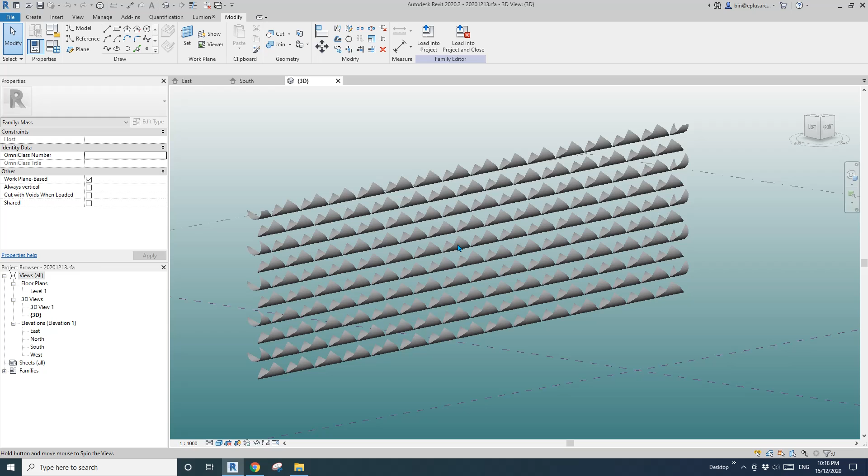So I think I built a parameter. Let me try this - so I built a parameter here, and if I change this, for example, change this to a huge number, it will close this panel.

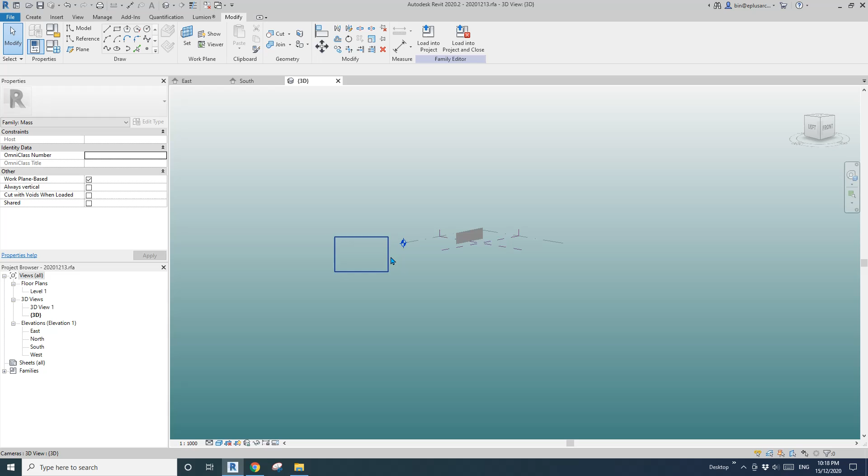So maybe I'll turn on the edge. Yeah, so these are the panels - so when it's closed, and then if I change the parameter, I can open them up.

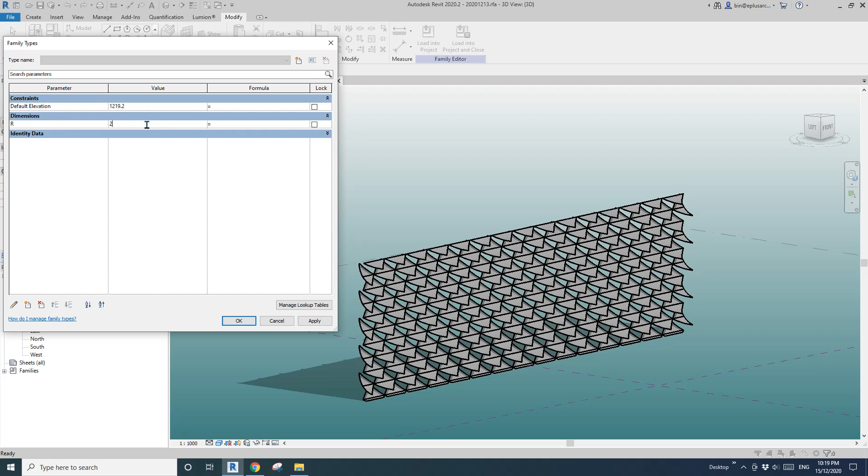Okay, so now let's do this. Okay, so I'll close this.

So first, we're going to create a curtain panel pattern-based family. Okay, so then select this tile pattern grids and change it to - how do you pronounce this - rhomboid.

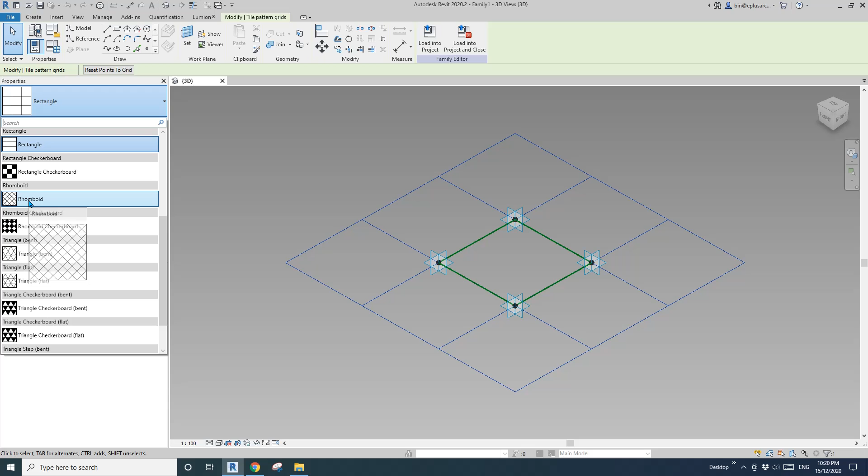Okay, so now actually I'm not sure which point is the top one. 1, 2, 3, 4. Top one, front. It says front here. Let me guess - this is the top. Okay, so 2 is the top. 3, 4, 1. Okay, so now let's start.

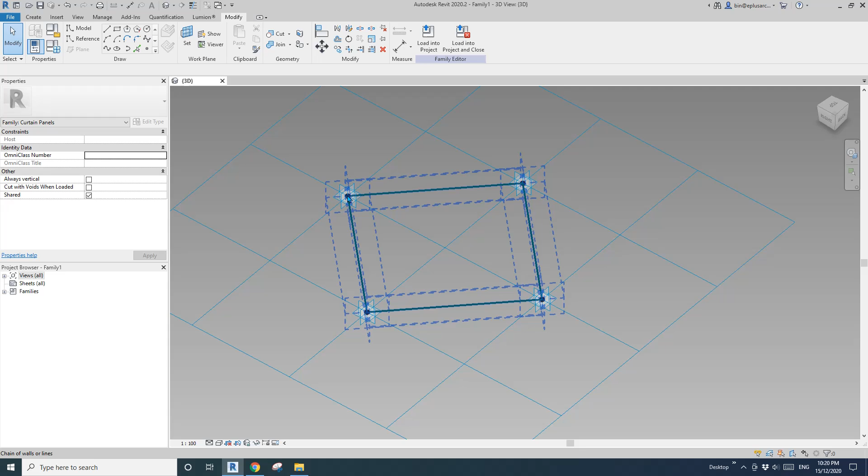Let me think, how do I model this? So first we need one point from this. Okay, this point - so one point, and draw a work plane.

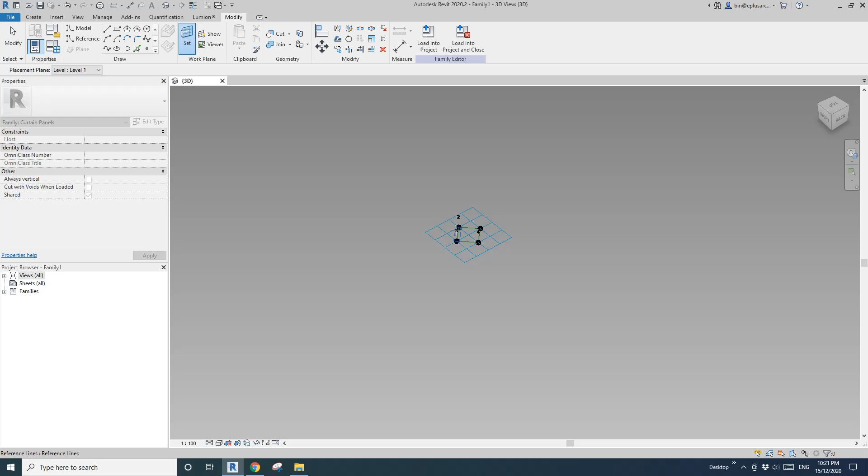Set work plane. Pick the horizontal work plane of adaptive point 2. Where's the number 2? Yep, here. So pick the horizontal work plane of this point and place it on point 2, and then select this point and drag it up.

Okay, so now I'm going to create this panel. It will be created from a curve, and this will be the center point of this curve.

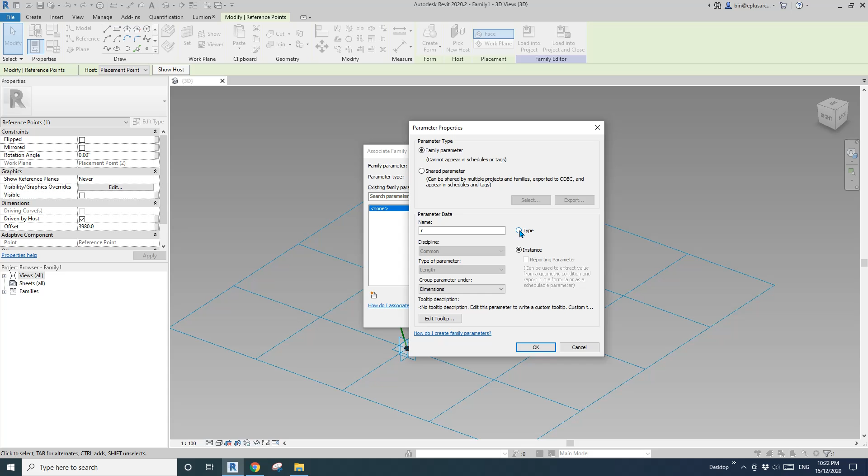Okay, so first I'm going to create an offset. So this point - see this point, that's the offset. That's the distance from adaptive point 2 to this point. So I'm going to create it, I'll call it radius. Okay, radius. Instance, no, maybe type, maybe instance. Okay, and okay.

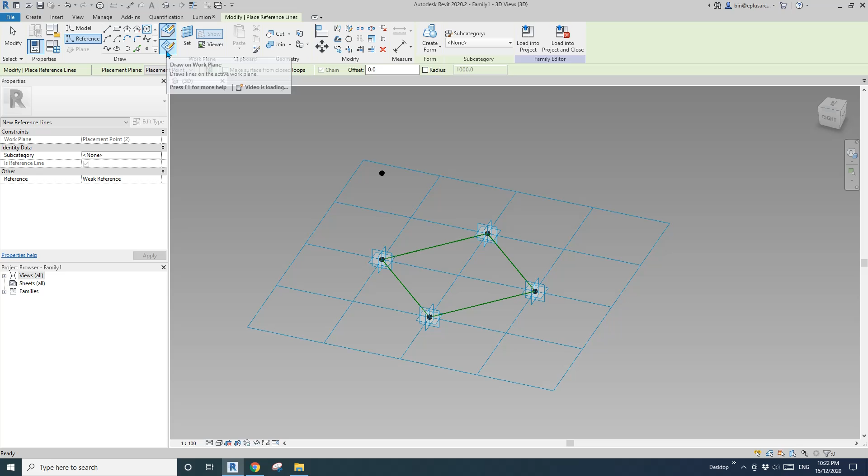So now we are going to create a circle from this point. Okay, so reference circle, and draw on work plane, set work plane. Make sure you pick this work plane, so it's this one - this direction. Yep, that's it. And then draw a circle.

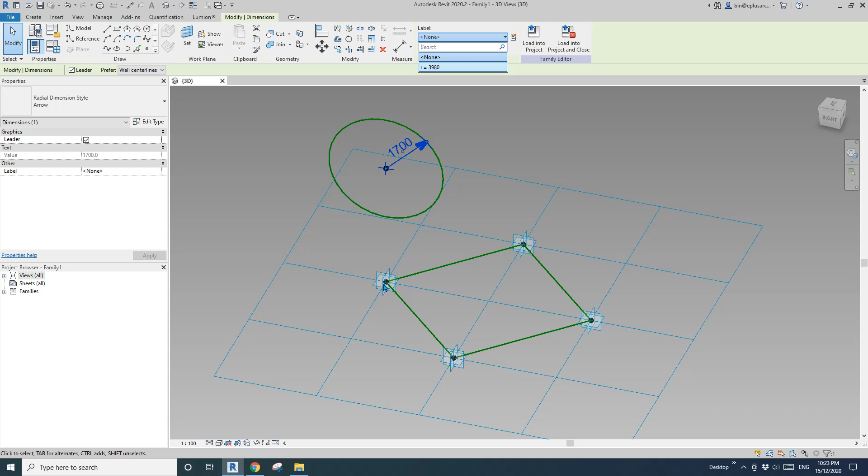Okay, so click on this little thing, and this will be the radius of this circle, and I'll just link this to the radius we just created - that's the offset from here to here. So if I link this, you will see this circle will go through this point. Okay, so if I move this point up, you will see the circle will always go through point 2, adaptive point 2.

So now I'm going to create and place a point on this circle. Okay, so point, this time draw on face and place it on this circle. Place it here. Okay, so now select this point, and here measurement type, change it to segment length, and let me just type in 0. Okay, so it looks like 0, it starts from here, but ideally I want this to start from this point.

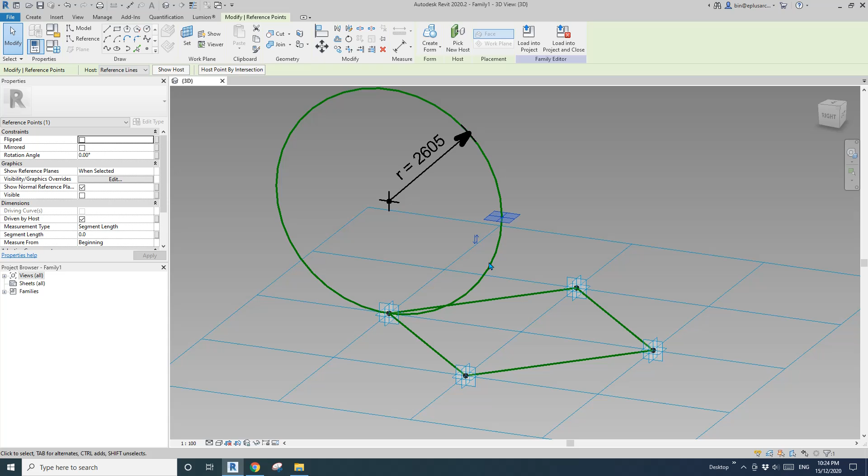So what I'm going to do is I'll see if I can rotate this circle. Okay, I'll rotate this by 90 degrees. Looks like no, it doesn't work this way. It's okay, let me think. How do we rotate this? How do we rotate the starting point of this?

Maybe we need some point - we need some point to rotate, which can rotate this direction. Okay, so what I'm going to do is I'll just delete this circle for now.

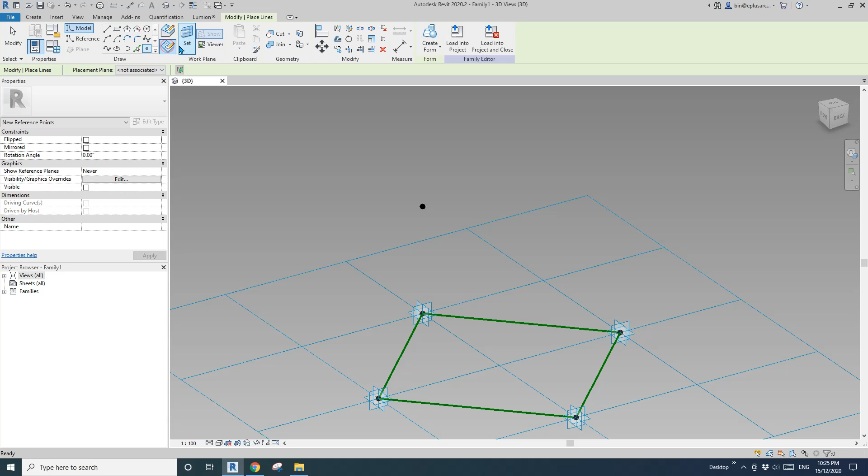Delete this point. So I'll create a point from this point. Okay, so place one point, draw on work plane, set work plane, and pick this work plane, so this one's okay, and place it on this point, and then I'll just rotate it. I'll just offset this point by a little distance, and then I'll create a spline and a reference line.

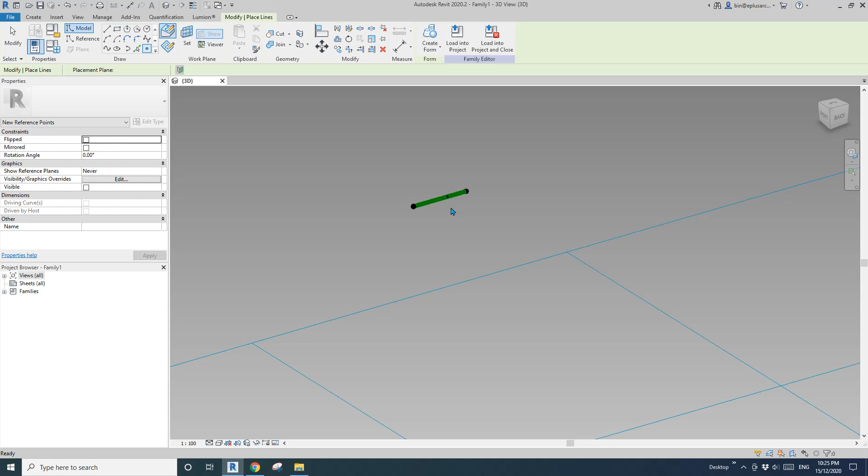Now I'm going to place another point, draw on face, and place it on this reference line. So now this point will have a rotation angle, here it's 0 degree. So now I can draw a circle on this point, and we can rotate this circle using this rotation angle.

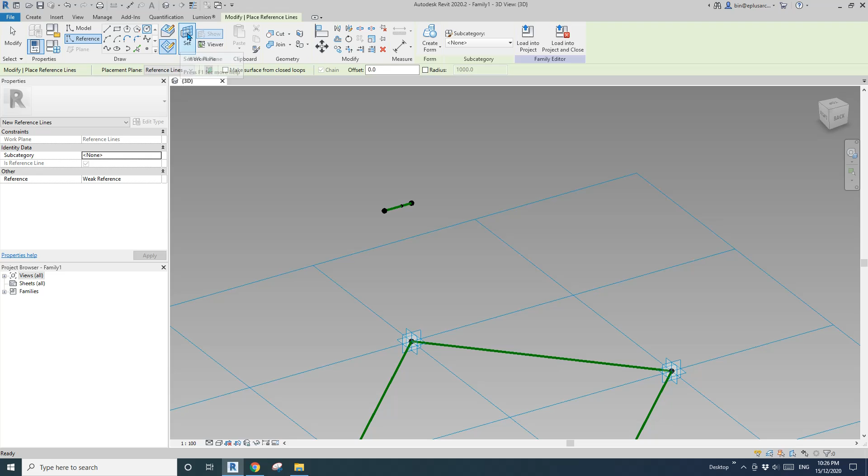So let's do it. Reference circle, draw on work plane, set work plane, pick this work plane of this point, and draw a circle and radius, and link this radius. So of course it's now offset from this point. We just need to select this point and change it to 0.

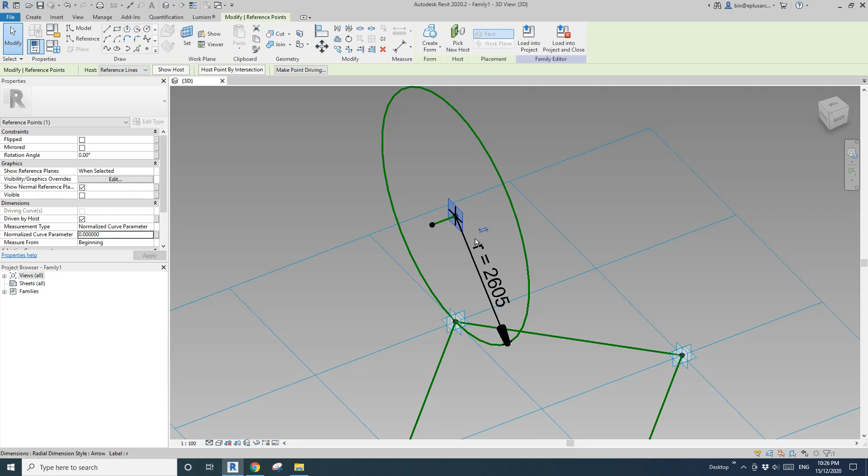So now we'll go through this point, and I'll just leave it for now. I'll place another point, draw on face, place it on here, and select this point, change this to segment length, this time change it to 0 to see. Oh actually, see, it's exactly sitting at the bottom of the circle, which is what we want it to be. Okay, so good.

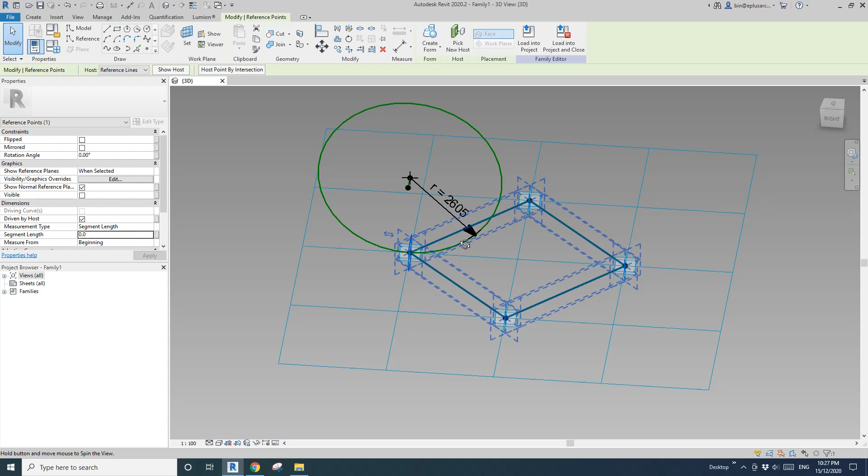So the next step, we're going to place another point here. Point, draw on space, and place it here. So this one, we're going to change it to segment length again, and for this number, we're going to create a parameter. This will be the panel.

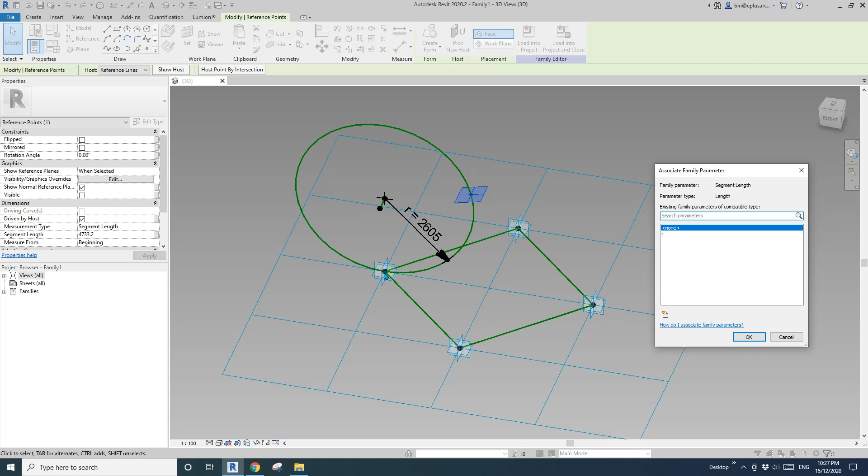So the panel, imagine the panel when it's dry, it's flat, so it will look like this. And this will be the length from point 2 to point 4. So I'll call it L, length, L instance. Okay.

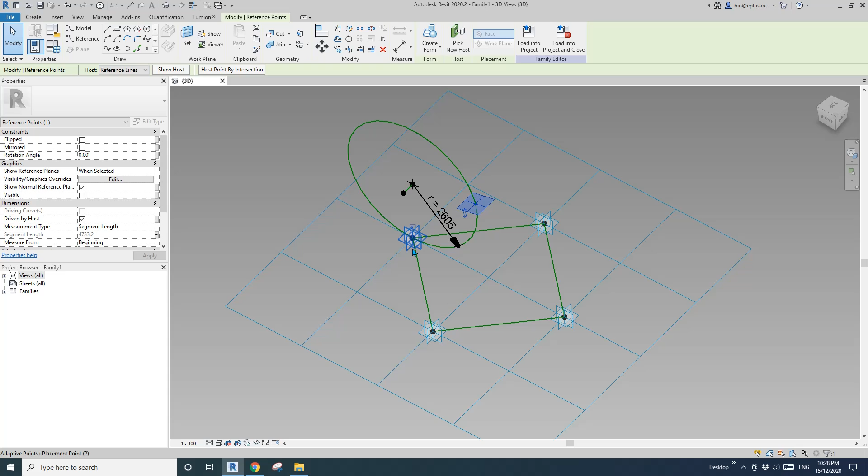So now we know this, the length of this arc is L. And then we're going to create a reporting parameter from the distance from point 2 to point 4. And then I'll match the length of this arc to the reporting parameter.

So before that, I'm going to create a spline through point 2 and 4 and make it reference. Then set a work plane, pick this work plane of this reference line, and do DI. Make sure you pick the point. It's a little bit hard to pick all.

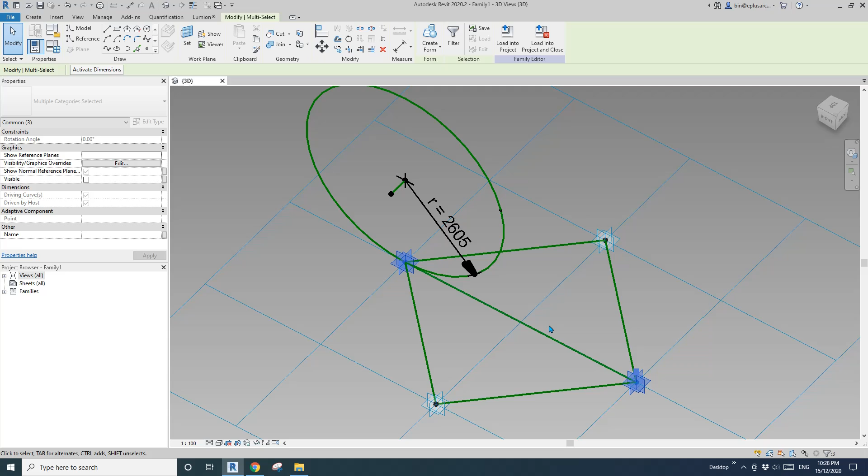So I'm going to just select these 2 points and hit isolate, and then I'll do a dimension, DI. Make sure you pick this point and this point. So now select this dimension and I'll create a reporting parameter. I'll call it L reporting.

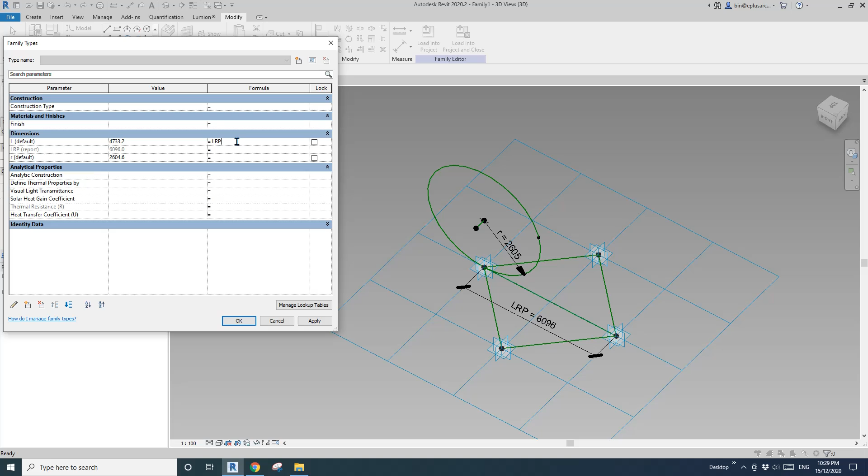Okay, LRP instance reporting, okay. So HR, and then go to family types. I'll just make this L equal to L reporting. So I'll type in L equals LRP. Apply.

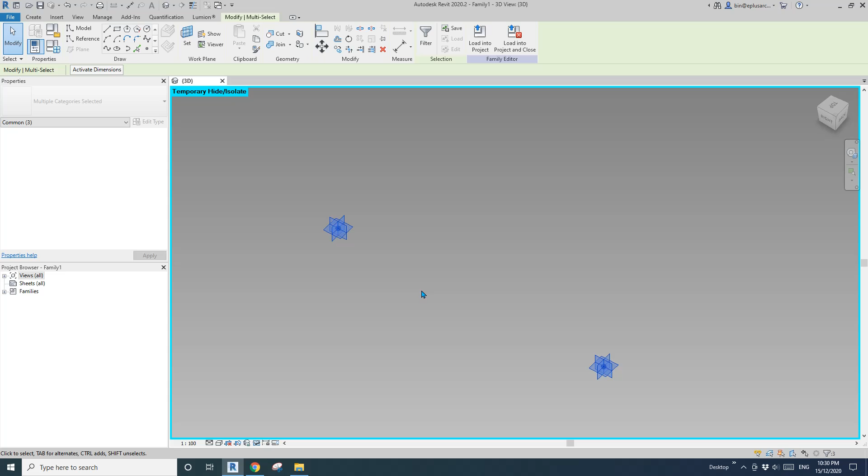Okay, so it looks like when we do the dimension, we placed the dimension on the work plane instead of on the point. So we just need to do it again. I'll select these 2 points together with the dimension, hit HI. Oops, so it looks like because the dimension is placed onto something and not on the point, that's why it disappears.

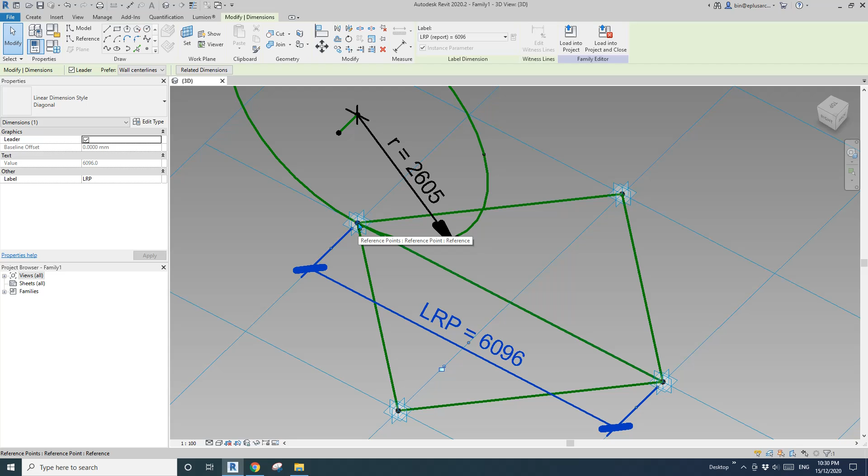So I'm just going to click on this dimension, select this point, drag this point, and try to find the point. Use the tab key, see the point become bigger. So that's it. Now let's do it again.

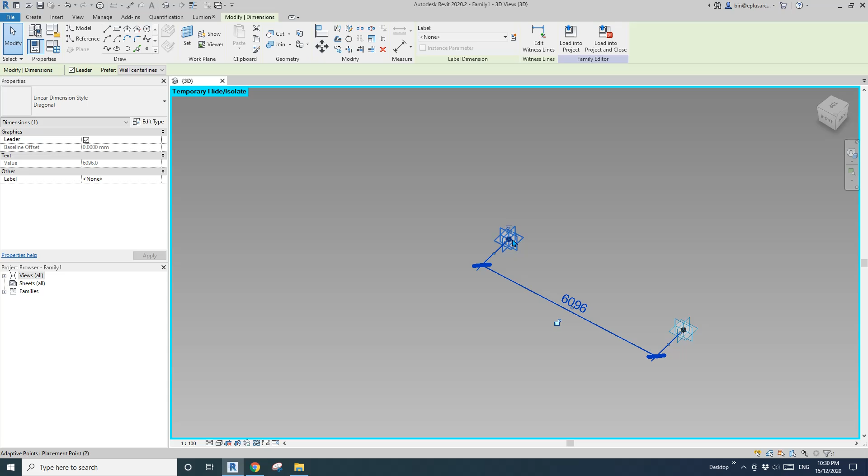So now this dimension should be placed onto - I'll try to select these 2 points and the dimension and type HI. See, this time the dimension is still there, which means this dimension is being placed onto these 2 points. Okay, so HR.

Now go to family types. And now we can do equals LRP, no problem. And okay, so now you should notice that this point goes up a little bit.

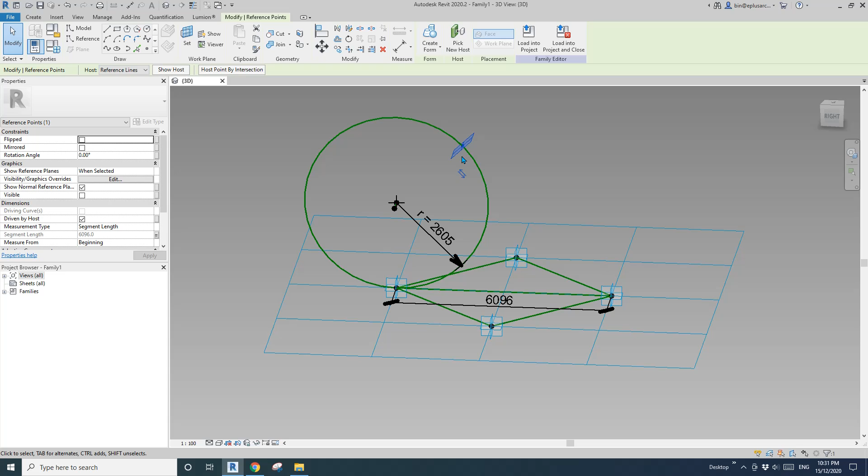So if I change the size of this grid, so let's try - not this one, this one. Can you see? Can you tell? Can't tell, hang on, something's not right. It's still 6 meters wide.

Oh, sorry about that. So click this one. See, this one's not. When we change the dimension from one element to a different element, it will remove this parameter.

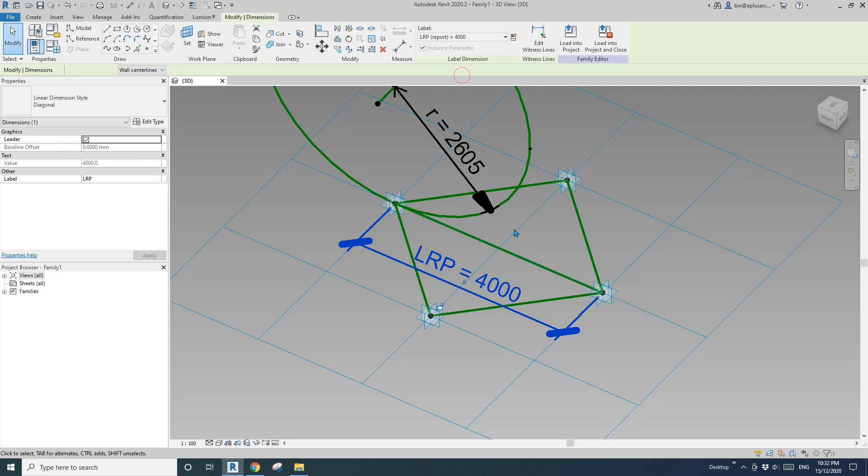So I'll just link this dimension back to the reporting parameter. Okay, so now you can see this point come down because we changed the size of the grid. So let's try again, okay, not here. So click on this grid, and if I change this to 3 meters, you should see this point go up.

Okay, so now we have this point. We have this point 2.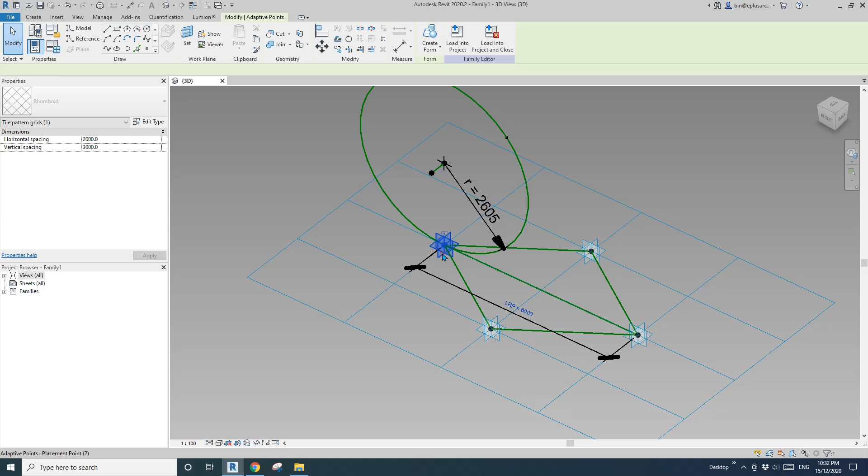Actually, there is another one, I think. If I temporarily hide this point 2, that's another one. So that's at 0, a point 0. So we are going to use this point and this point, and we will also have another point in the middle.

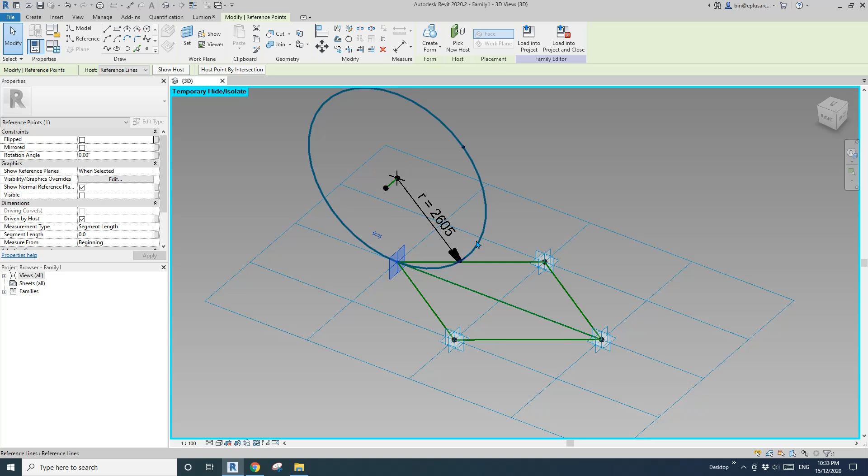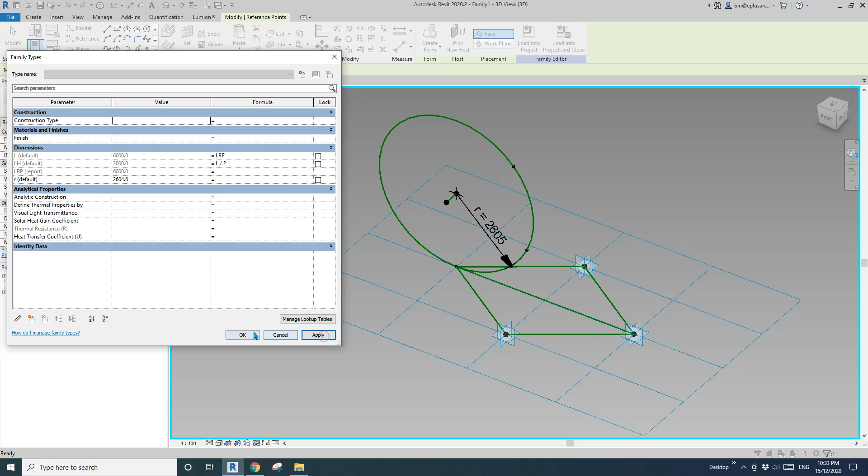So we're going to create another point in the middle. One point, draw on surface, place it here, select this point, change this to segment length, and create a new parameter. I'll call it half L, maybe LH, instance, OK. Now go to family types: LH equals L divided by 2. So this point will always be in the middle of this arc.

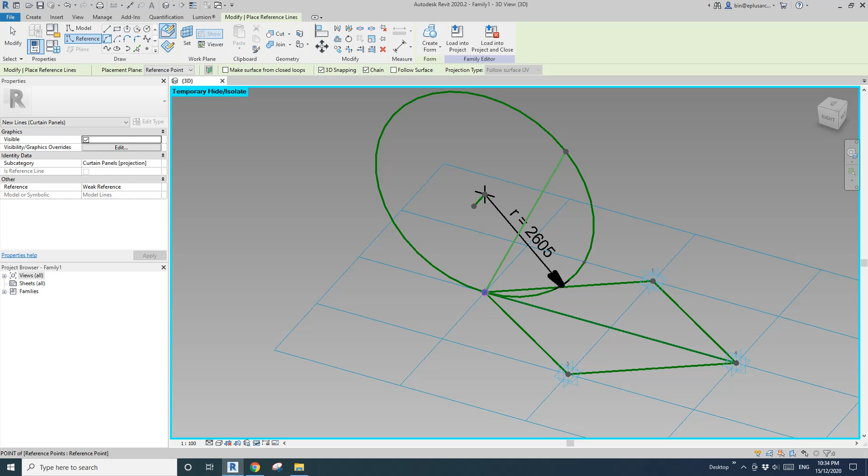Now I'm going to create an arc, a reference line arc, using start and radius arc, with 3D snapping, making sure it's draw on face. Place it: first this point, start, and radius. So start here and radius here. Now let's test it.

We just need to make sure this arc will always match this circle. Let's try changing this grid to 3, 2, apply. See, still there. Good, so that's exactly what we need.

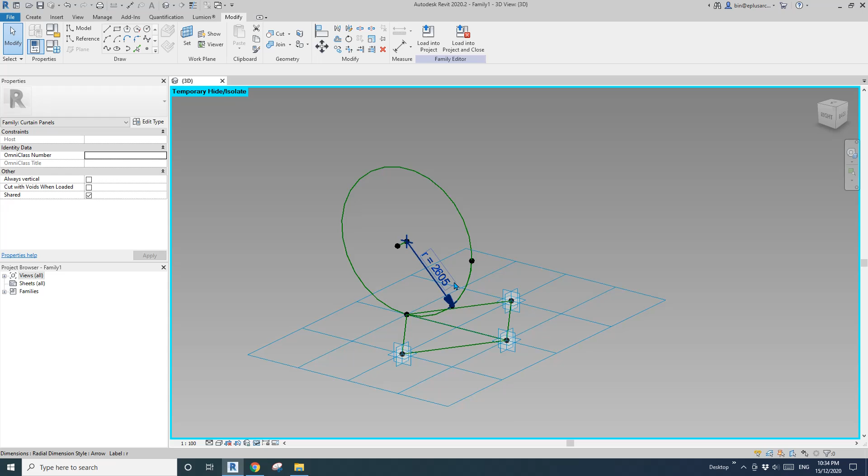So now what we're going to do is create a sweep. I'll just move this temporary hide away so we can see this point. This sweep will be a curved shape of the base, this diamond shape.

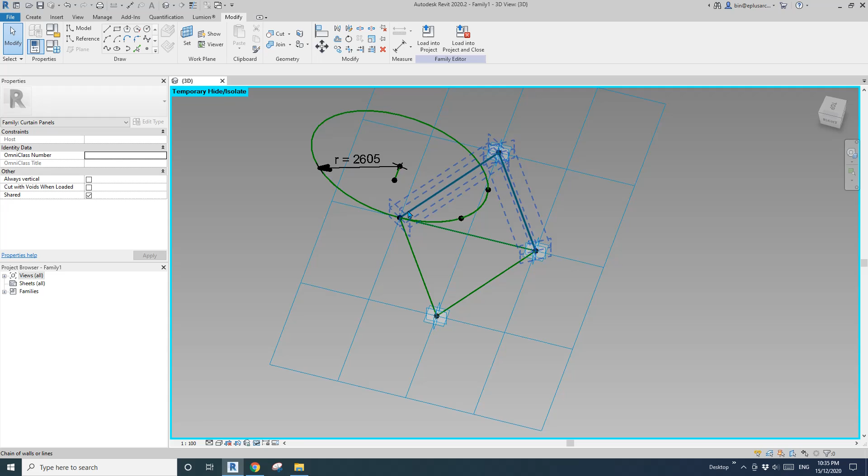I'm going to place a point, draw on face. Oh no, not draw on face, draw on work plane. Set work plane, place it on the vertical work plane. Use tab, that's it, and place it on this point, the middle point, OK. Then trying to pick this point, tab and drag it this way.

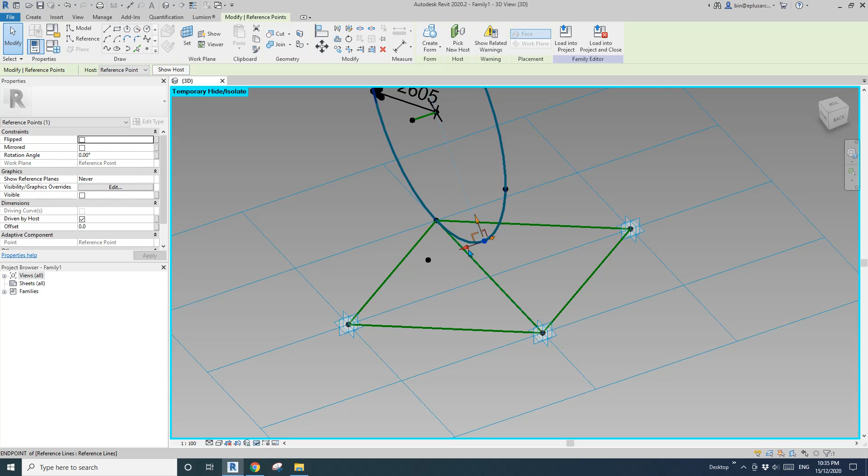So we will need another one, on the other side. Tab, place it here. Tab, select, and go that way. And of course we will need another reporting parameter.

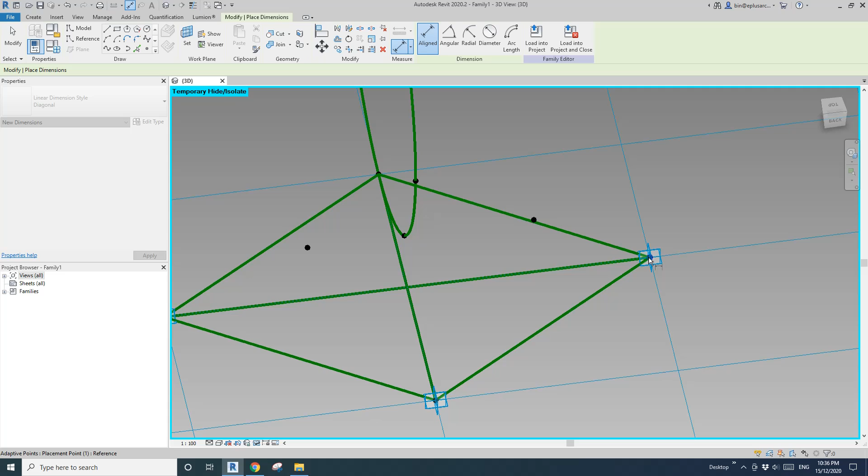I'll select these 2 points, 3 and 1, and spline reference line. Set work plane and pick the work plane of this reference line. Make sure you pick the point, and this one, make sure you pick the point too. Now create a reporting parameter, I'll call it width reporting, WRP, instance reporting, OK.

So now this point - we just need to create an offset. This time I'll call it width half, instance, OK, and go to family types. So width half will equal width divided by 2. Oh sorry, width reporting divided by 2. Apply. So now you will see this point will match point 3, and same with this one.

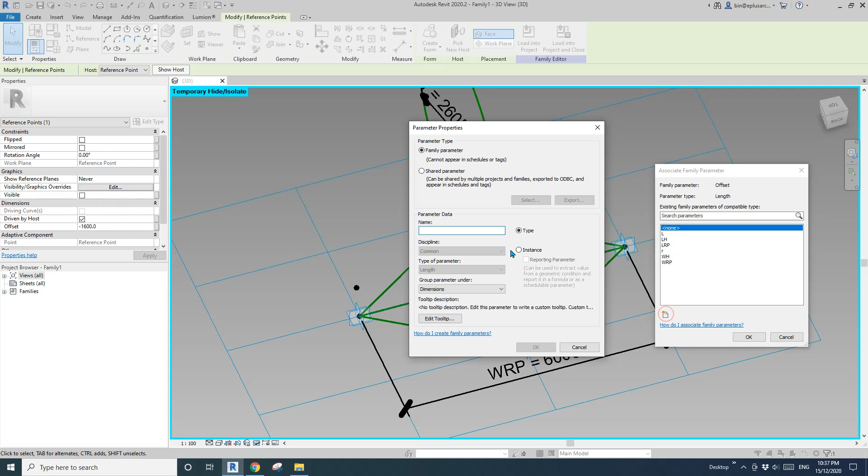Because this one's negative, we're going to create a new one. I'll call it width h negative, instance, OK. Go here: width h negative equals negative width h. Apply, OK.

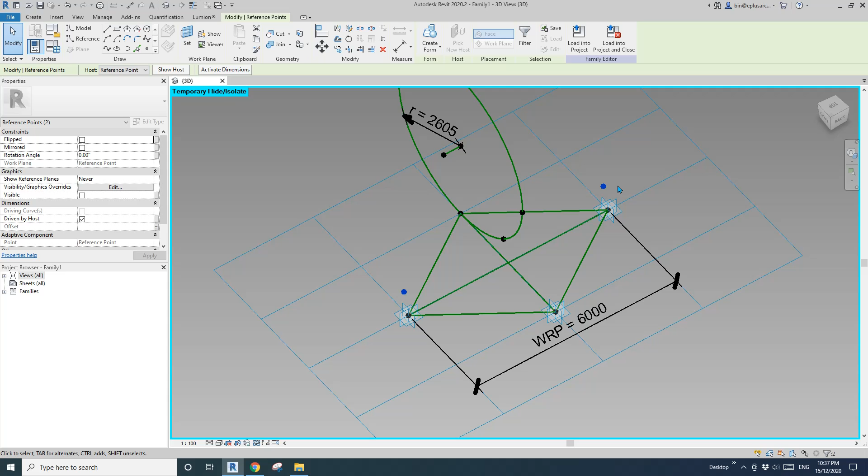So now select these 2 points, line, reference line. Now we have this - we're going to create a face. So this line will be the profile.

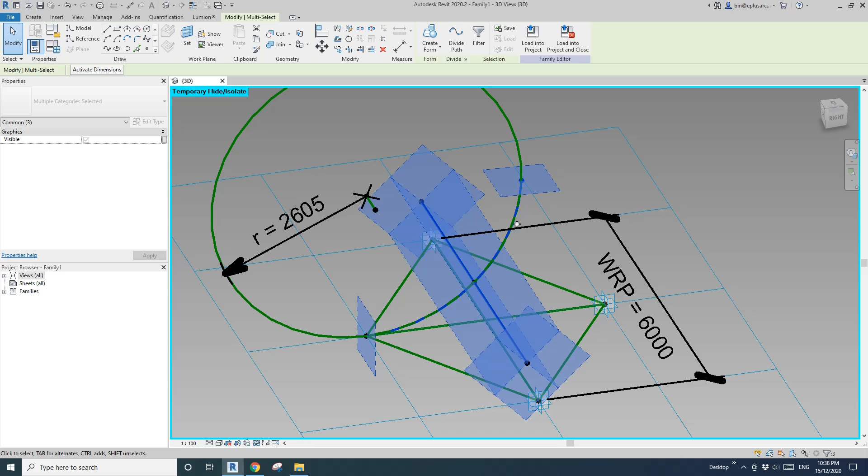Let me try if I can use a point as a profile: 1 point, 2 point, and also this curve, this arc as the path. Nope, we can't - which means we need a very little line here.

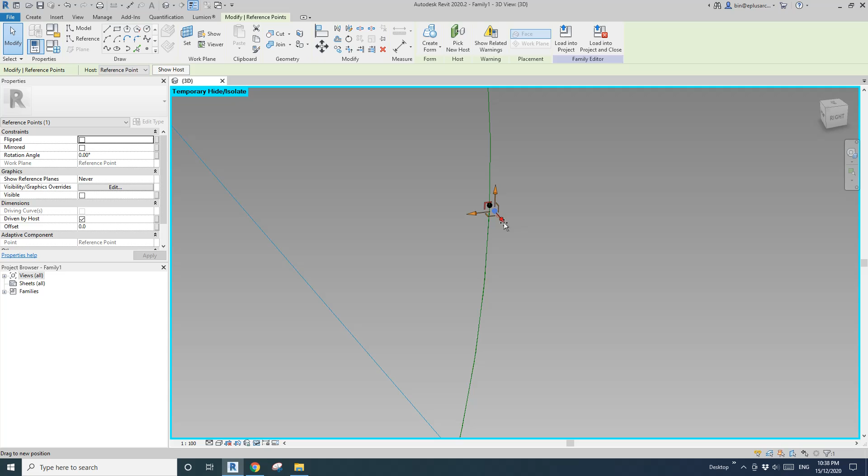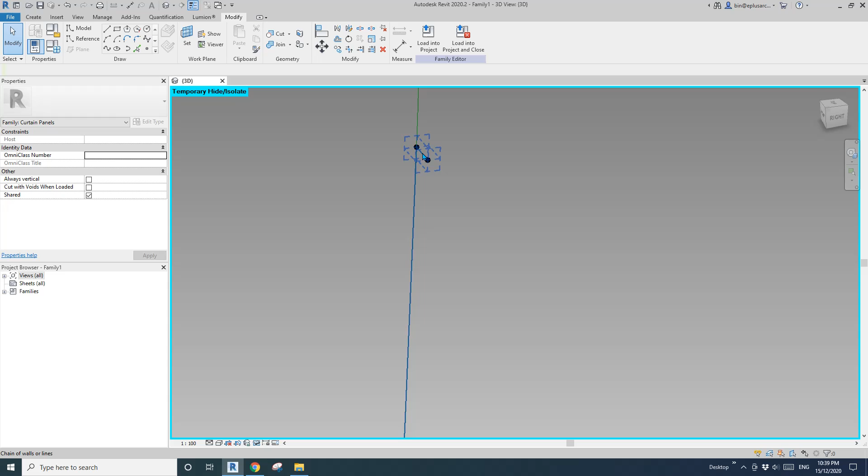Spline, reference line. Maybe I'll make it smaller, so 2. Now select this - make sure tab, since if you just move your cursor on it, you will also select this arc. Make sure tab, then select this line - this will be the profile of this end. Then control-select this one - this will be the profile of this end, and also this path. Create form.

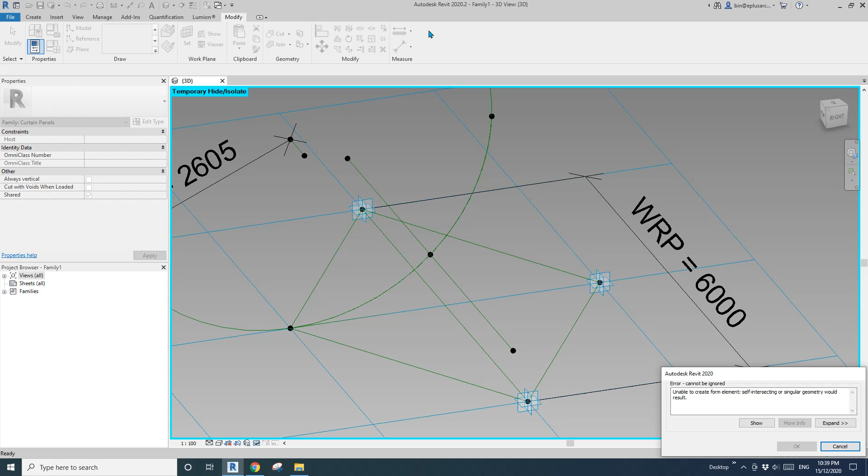Unable - that's okay. What we are going to do is place another point on this side.

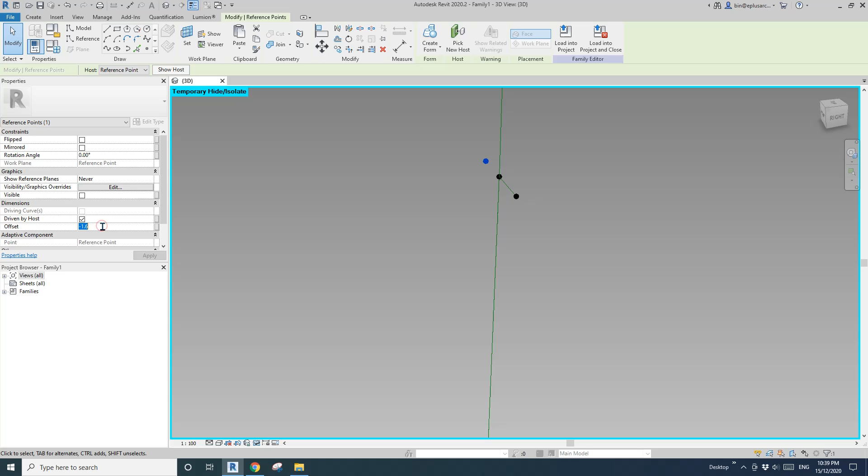Okay, so point, draw work plane, set work plane, tab, place, and okay. This time, select this point, go that way, make it -2. Now I'm going to select this line and dissolve it. Then I'll select these 2 points and create spline and reference line. So let's do it again.

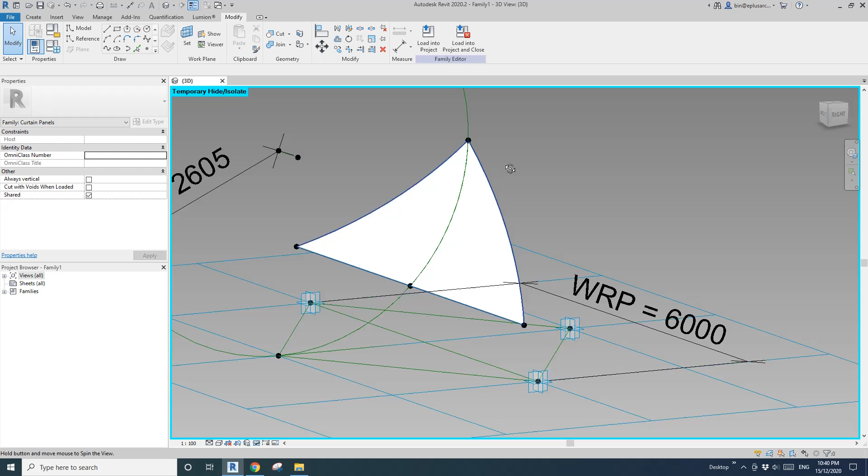So this profile and this profile and this path, create form. This time we successfully create this shape. Okay, so now let's repeat. On this end, I'm going to place on this point.

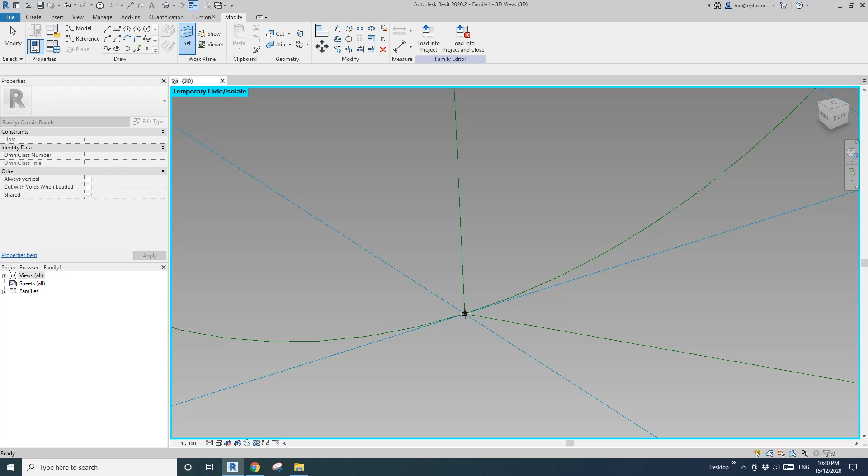Point, draw a work plane, set work plane, pick the vertical work plane and place it here. Drag it this way and place another one. Draw a work plane, set work plane, tab, and place it there. Move this point that way.

So select these 2 points and spline reference line, and then I'll select this point. I'm typing -2, -2, and this point 2. So I'll zoom in and place this.

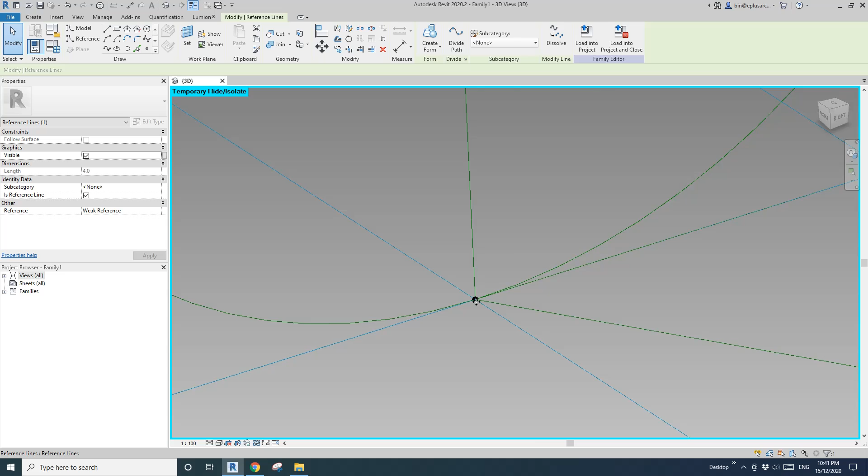Select this profile, this line as profile, and also tab, select this one as profile and also this path, and create form. Now we have this shape. This shape is a curved form of this shape.

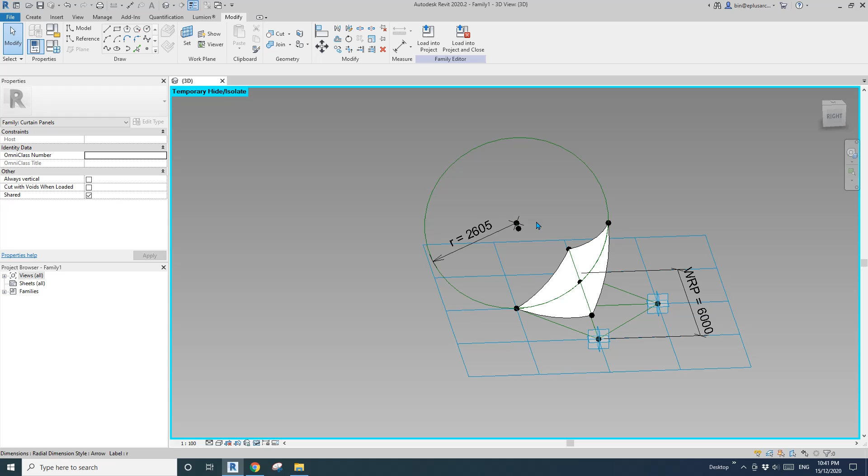So for example, if I change the radius of this, let's see if I change this radius to a quite big number. Apply. So it's almost flat to match the base. And if it's 2 meters, it just curves up. So 1 meter, even more. Yeah, so that's what we're looking for.

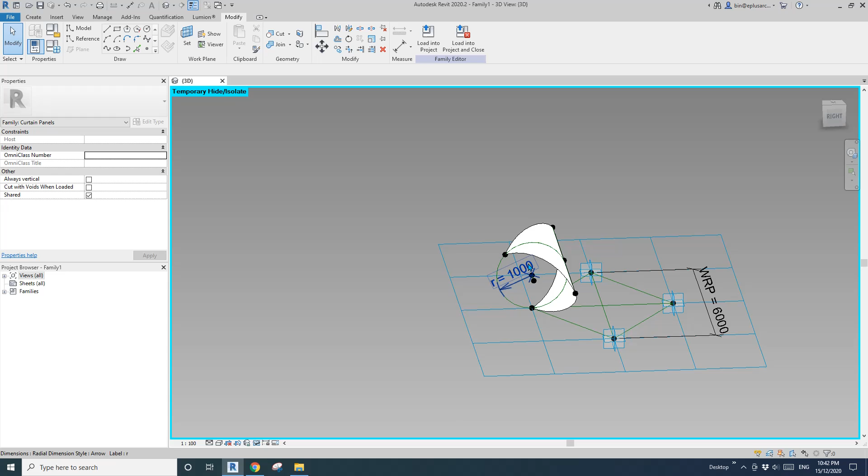So now let's try how it reacts. Yep, so that's everything.

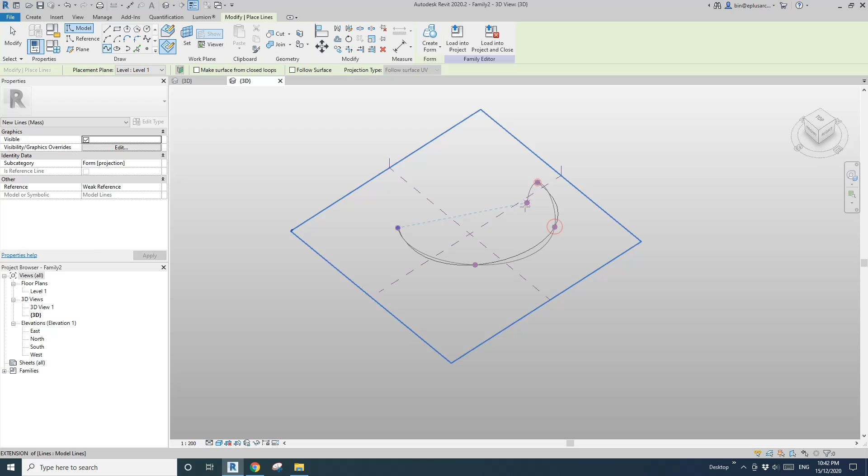Let's create maybe just a mass. Okay, so I'll do a spline. 1, 2, 3, 4, and create a form. Maybe like this. Okay, so now let's...

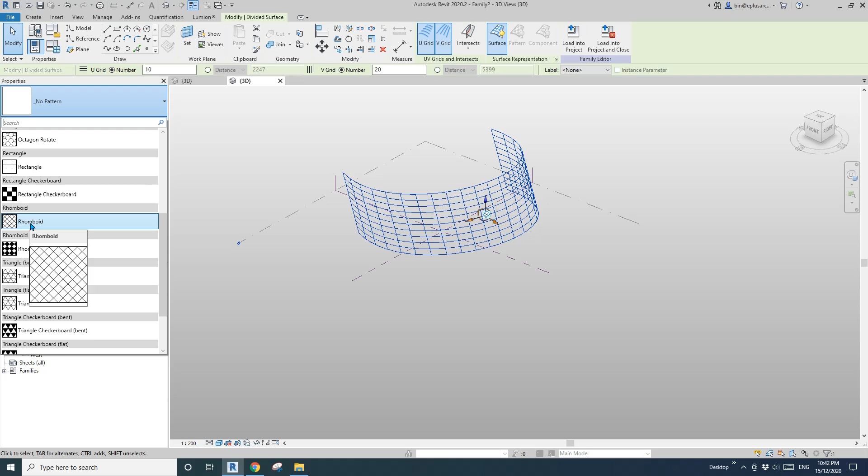Make it - is it too big? No, that's okay, 20. Then change this to rhomboid. Yeah, rhomboid, yeah, maybe 30. Let's load this into here and select this. Change this to family 1.

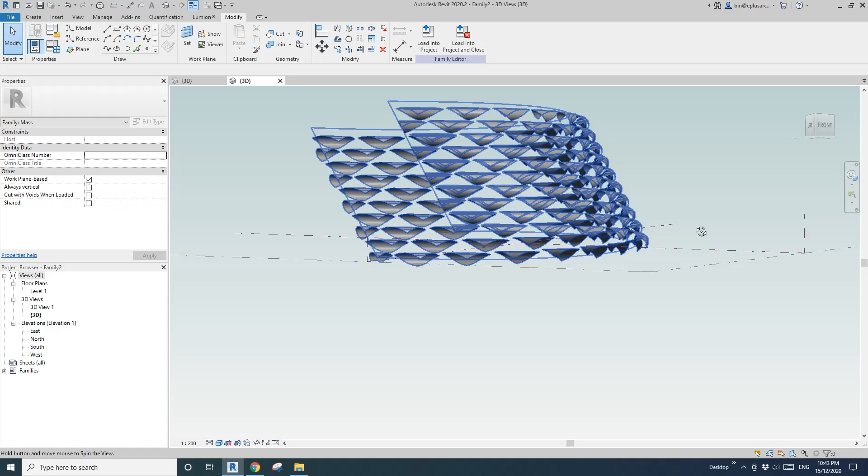Looks like the direction is wrong. No, that's okay, we don't need to model it again. Just need to select this one and maybe change it by 180 degrees.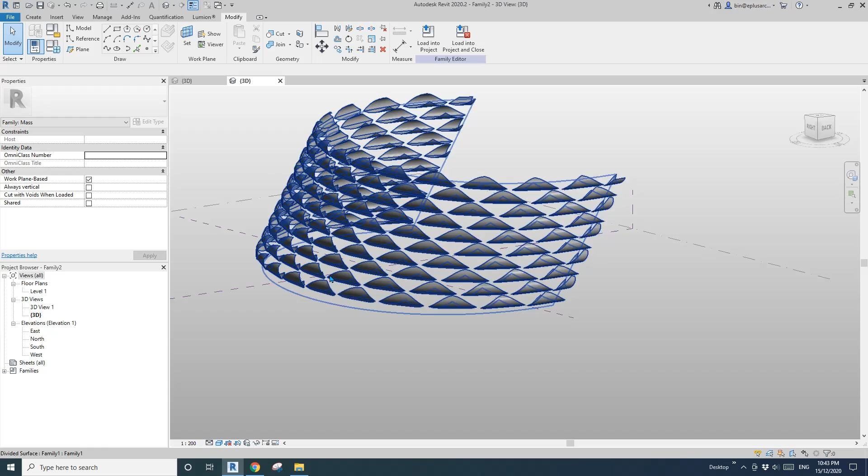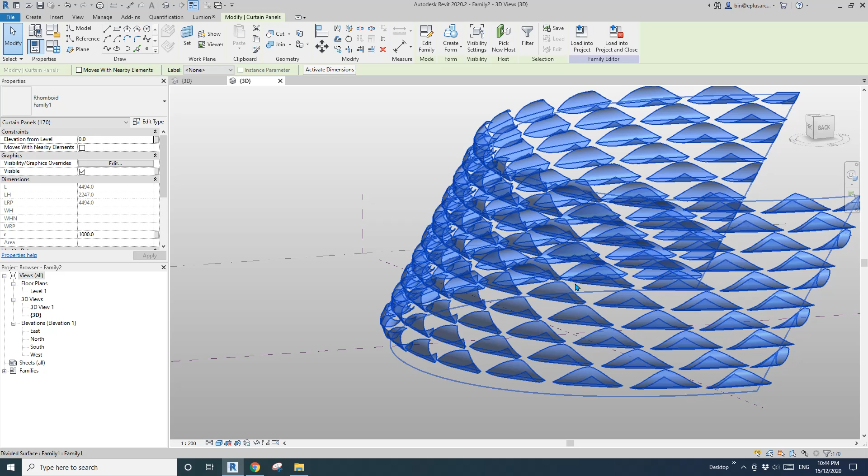Okay, so I think that's it. So let's have a test. Let me think, where's my parameter? Where's my parameter? It's not here. It's not here. So tab, select one of them. Oh, it's here. So I'll select all, and actually I'm just going to create a new parameter. I'll call it R, or radius, and type in this instance.

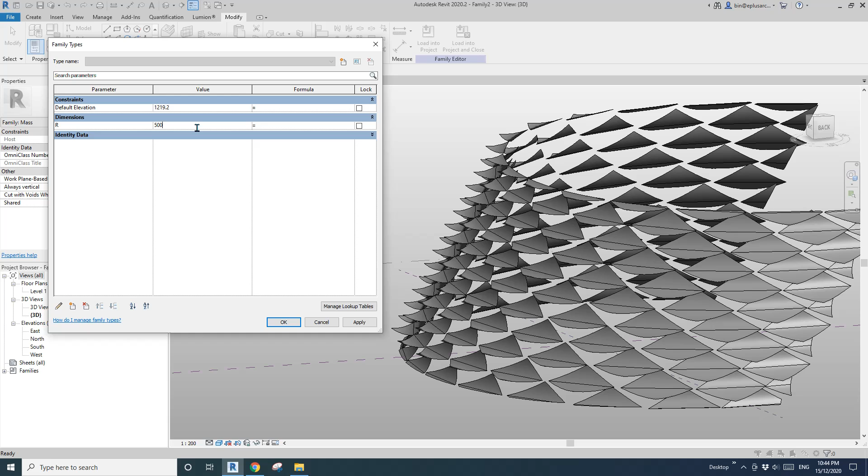That's fine. Okay, so go to family type. Now we can just change this to - let's have a look. So 1 meter radius, 2 meter radius. It should flatten a little bit. Yeah, 3 meters. 5 meters. Yeah, I think it's good.

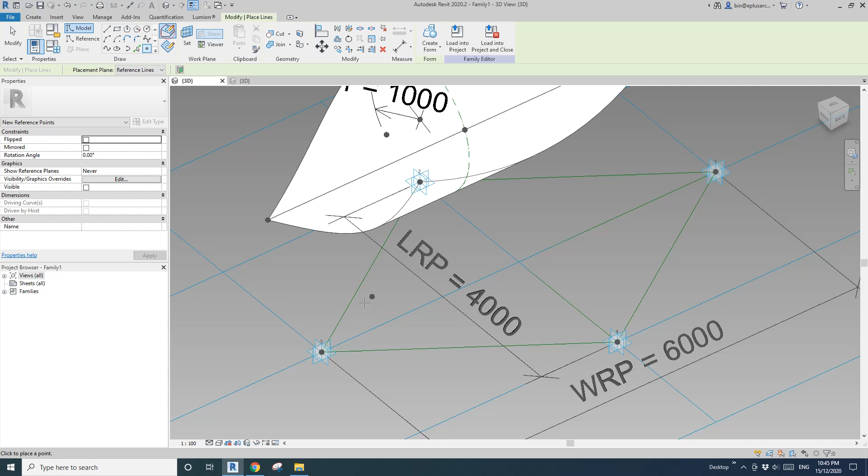Yeah, so actually I'm going to edit this family, and let's create a frame. Okay, I'll place 1 point, draw on face, and place it on this reference line, and I'm going to do a circle. Draw on work plane, set work plane, pick this work plane, maybe 50, and make it reference line.

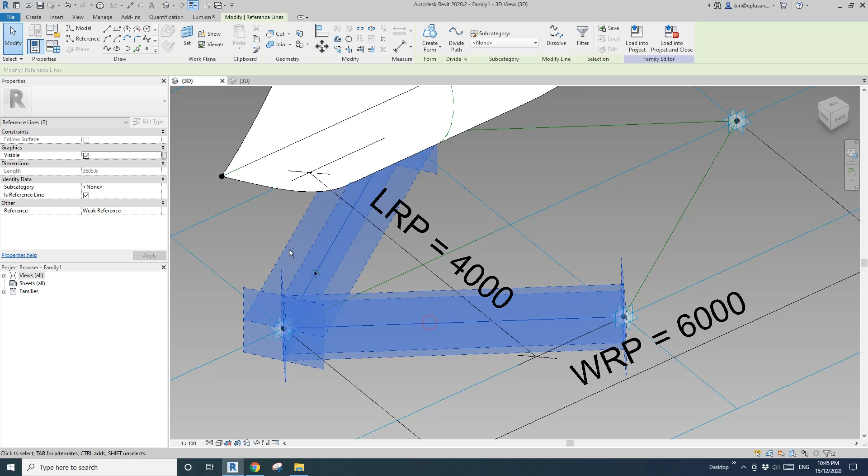Select all the frame, or maybe I don't need all the frame. Maybe I only need 2 of them. Yeah, maybe I need 2 of them, and create form. Let's load this into the project - or not, into the mass. So this time we will also have a framing behind, so I think it looks better.

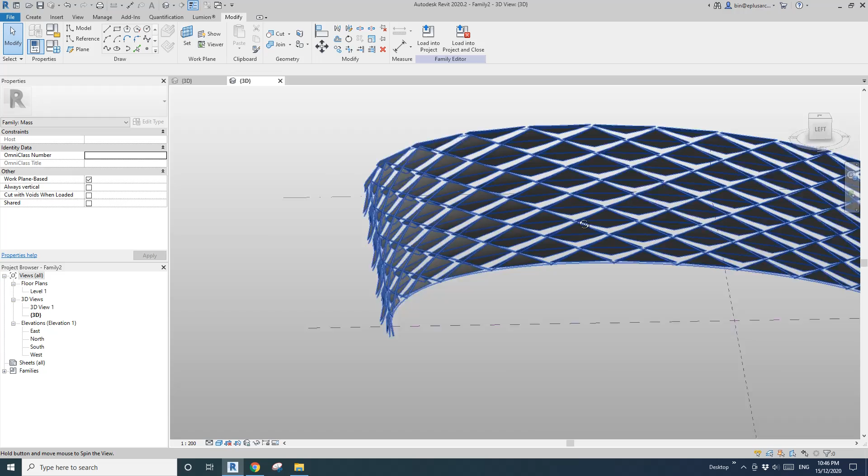Can you see the frame? Yeah, good. So let's try the parameter again. So 3 meters, because this time there's a frame behind, you can tell. So that's something, it's like yeah. Go up and there's still some framing behind.

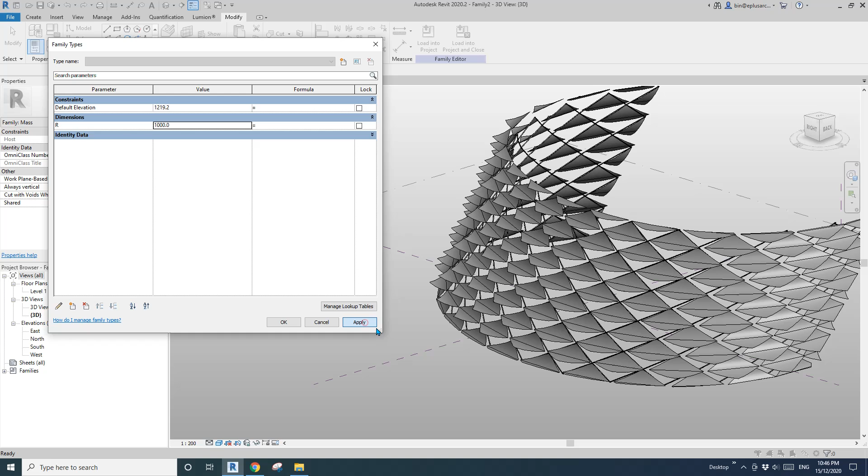Yeah, I think that's it. So what do you think? And also you'll notice that there's a line there. Actually, this is a very perfect curve, and if you uncheck the show edge, you will see this is perfect.

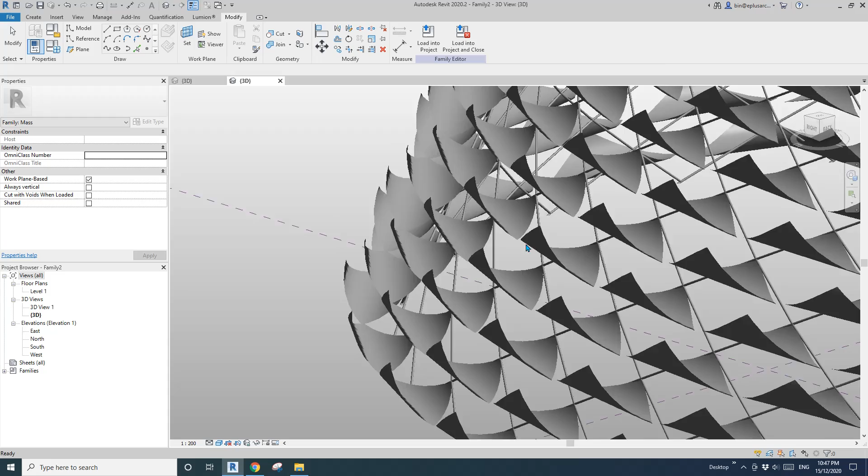Oops, sorry, what did I do? It's a perfect curve, and if you render, you won't see any line between. But if it's on hidden line or shaded with edges, you will see that this line. So okay, that's it.